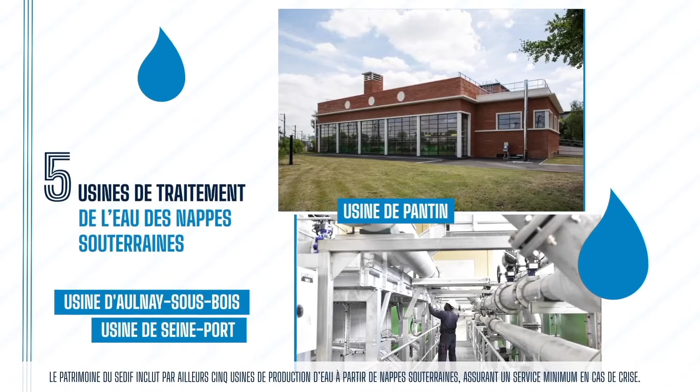Le patrimoine du SEDIF inclut par ailleurs 5 usines de production d'eau à partir de nappes souterraines, assurant un service minimum en cas de crise. Il est le plus grand service public d'eau potable français et l'un des tout premiers en Europe.

En 2020, le SIAAP a mis en œuvre les moyens nécessaires pour assurer la continuité de ce service public essentiel. La mobilisation sans faille des agents du SIAAP pendant cette période complexe montre son engagement auprès des territoires et des usagers. Il a notamment continué à effectuer plus de 420 000 analyses pour surveiller son eau et garantir une qualité d'eau irréprochable.

Dès mars 2020, tous les usagers du SIAAP étaient rassurés sur la qualité de l'eau délivrée, un service essentiel qui l'est encore davantage lorsque les populations sont confinées et au moment où se laver les mains régulièrement est l'un des gestes barrières les plus importants comme rempart contre la transmission de la maladie.

Pour assurer la maintenance et le renouvellement régulier de ces infrastructures, le SEDIF a investi 91 millions d'euros en travaux cette année, mais aussi pour soutenir l'activité économique de son territoire.

En 2020, le SIAAP a poursuivi ses études visant à étendre la technologie d'osmose inverse basse pression, OIBP, à ses usines d'Arvigny, Méry-sur-Oise, Choisy-le-Roi et Neuilly-sur-Marne.

Le projet, vers une eau pure sans calcaire et sans chlore, a pour objectif de délivrer une eau toujours plus pure, très douce, agréable à boire, sans perturbateurs endocriniens et sans résidus plastiques.

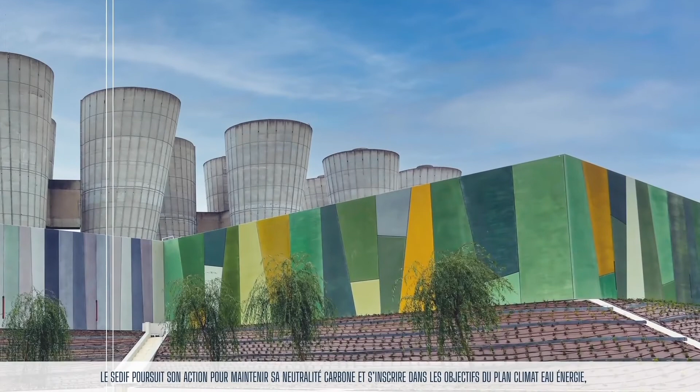Le SEDIF poursuit son action pour maintenir sa neutralité carbone et s'inscrire dans les objectifs du plan climat-eau-énergie en réutilisant la chaleur produite par ses installations et en compensant ses émissions résiduelles de gaz à effet de serre.

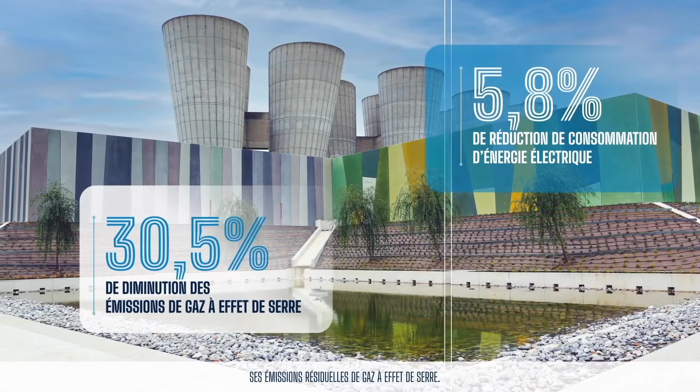Ces innovations permettent au SIAAP de toujours délivrer une eau d'excellente qualité au bénéfice de tous, à un prix maîtrisé, en baisse de 10 centimes au 1er janvier 2020, revenu au prix en vigueur en 1998.

Acteur de proximité solidaire, le SIAAP se mobilise pour aider les foyers fragilisés sur ces territoires. Il consacre 1% des recettes de vente d'eau, soit 2,5 millions par an, à son programme Eau solidaire.

Au-delà des frontières, le SIAAP a contribué en 2020 à 21 opérations dans 14 pays pour plus de 2 millions d'euros.

Parce qu'il est un acteur performant, engagé et durable au service des collectivités territoriales et des habitants, le SIAAP entretient et garde la confiance de ses membres.

Année d'élection, 2020 salue l'arrivée de nouveaux délégués. 4 sessions de formation leur ont permis de se former au fonctionnement et aux enjeux du service public de l'eau malgré la crise sanitaire.

Les nouveaux délégués ont réélu André Santini président et ont engagé leurs réflexions et leurs débats sur le choix du mode de gestion à l'horizon 2024.

En s'appuyant sur les études menées en toute transparence par une équipe pluridisciplinaire et indépendante. En anticipant les enjeux d'avenir, le SIAAP se positionne comme un acteur innovant, performant et durable au service des collectivités territoriales et des citoyens.

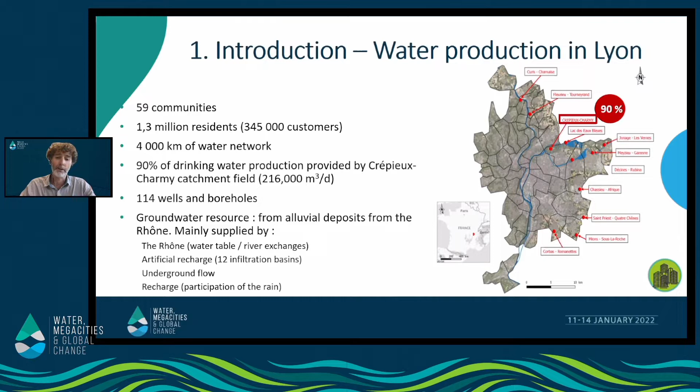Let's start with a brief presentation of the city of Lyon. We have 59 communities, 1.3 million inhabitants. The network is made of about 4,000 kilometers of pipes, delivering approximately 216,000 cubic meters per day. We have 114 wells pumping water from underground resources, and we also use water from the Rhône River.

I think the slides are changing a bit too rapidly, but it doesn't really matter.

Don't go too fast when changing the slides, please. I'm not finished with that one. Thank you very much.

Many studies prove that the climate is becoming hotter in Lyon, in the south of France. We can see that temperatures are going up near the Rhône River, the river's temperature is rising, and the outside temperature is also going up in Lyon. So we have to react and adapt ourselves.

Next slide, please. Thank you very much. So you can see results here on this slide. Les résultats... Oui, non, c'était avant. It was the one before that, the previous one. So the one before that, please. Yes, that's the one, thank you very much.

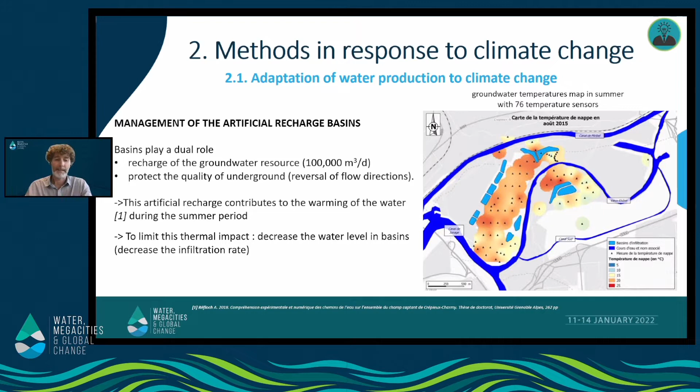The results you can see on the slide come from a PhD. The first one is on the artificial basins, shown in light blue on the slide, which are used to keep the right level for the water table. The drawback is that they actually contribute to the increase in temperature during hot periods, so what we're trying to do is limit the speed of infiltration, but it's not enough.

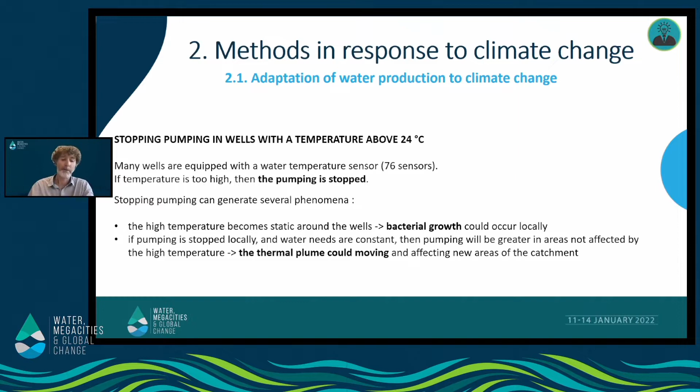So what we have done is put special equipment in place to measure temperature. If temperature goes above a threshold, pumping stops immediately, and pumping starts in colder areas instead. But this creates a major problem: there is a risk that bacteria might develop around the wells that are not functioning, and temperatures might also go up in all the basins.

No, the slide before that, please. The one before. One more. That's the one.

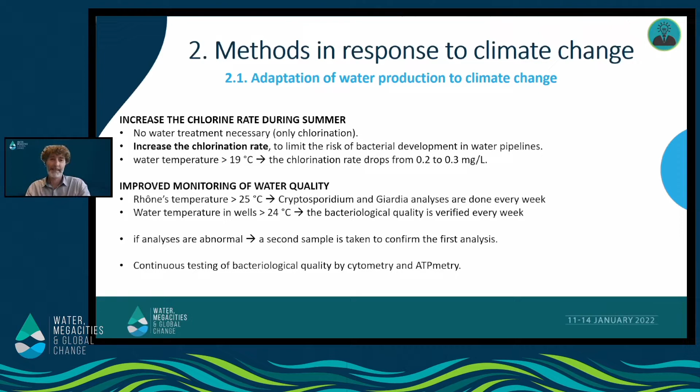Next slide, please. It's the one on Smart City.

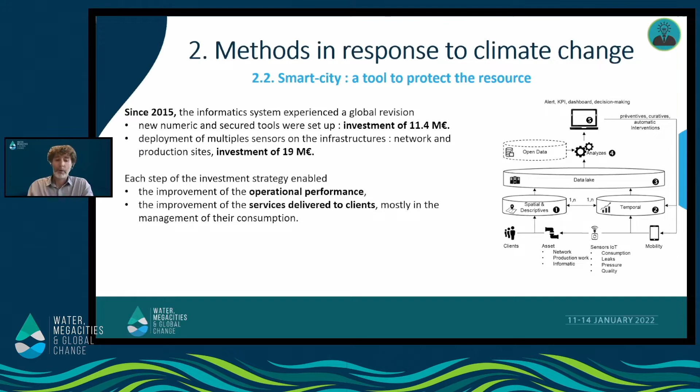Thank you very much. So since 2015, in Lyon, we have entirely modernized our information system. We invested more than 11 million euros in it, adding new tools and investing in new sensors to measure pressure and quality. What we're trying to do is attain the right level of performance in terms of monitoring and quality, and to give the right answers to the client, because this is what matters.

It has an impact on the consumption level, and make sure that we don't use too much water compared to the level of resources available. Now, what you can see on the right of the screen is the efforts we have undertaken in order to simplify our system. We have improved our descriptive database, customers, technical equipment, software.

And then we also have a digital monitoring system. Monitoring is done entirely using digital tools. We have a report on all that is done. We have sensors and smartphones that are part of our equipment. Now, thirdly, all this data is sent to a storehouse, so that really enables us to improve the general performance of the whole system. Fourthly, it gives us access to all our data.

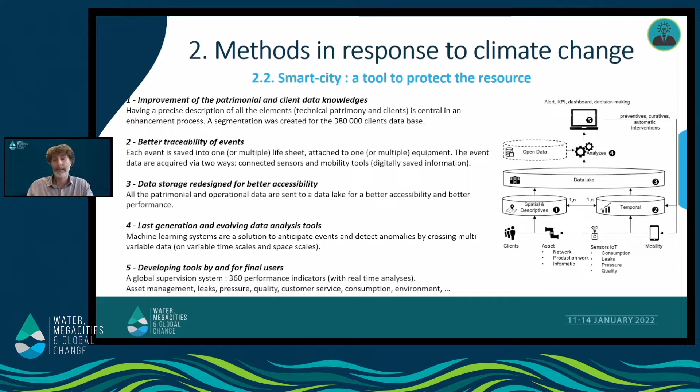It's a single stop shop, and we're really trying to innovate. We have people within our teams who are specialized in analyzing and who can do predictions. And we also use outside data coming from the French National Meteorological System. We have, as of today, 360 performance indicators specially developed. Some of them can be used in real time and enable us to do predictions hourly or daily, depending on our needs.

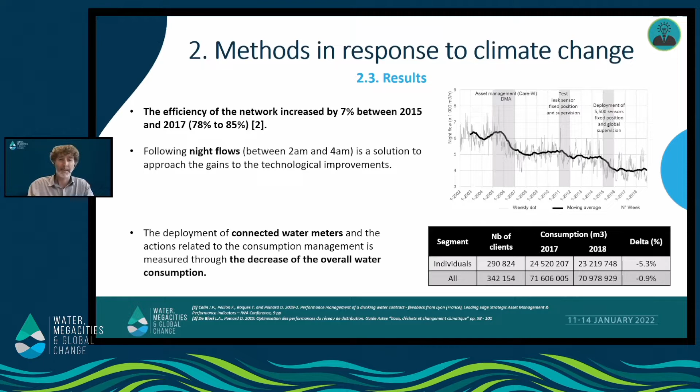We have to use innovation. Innovation helps us improve the resilience of cities, of communities, and we have to fight against overconsumption. We have to be more sober when it comes to using water, and we have to work within the global warming plans.

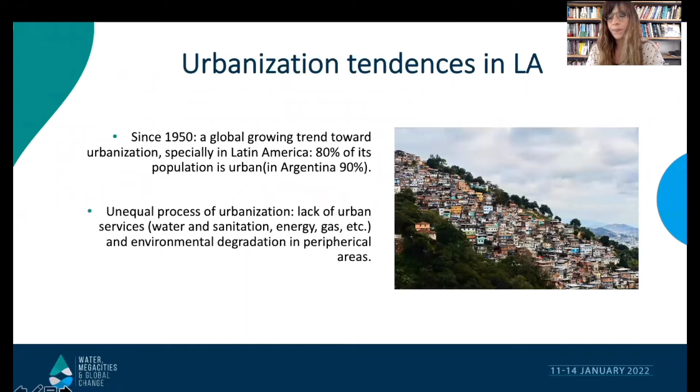The theoretical approach that we use in this paper is inspired in Graham and Marvin's concept of splintering urbanism, which shows how the role of networks infrastructure increases urban fragmentation.

This framework evidenced the existence of bypass strategies of urban developers and service operators to extend services to rich peripheral areas without entering to poor neighborhoods. And also the way in which the restriction on access to the service for low-income population historically has been justified by regulatory frameworks that require land tenure and technical arguments on slums and informal settlements' urban characteristics.

In consequence, the design and expansion of the water and sewage networks in the region reveal a scenario characterized not by an integrated network connecting different areas, but by the image of infrastructure archipelagos where formal and informal service provision overlap.

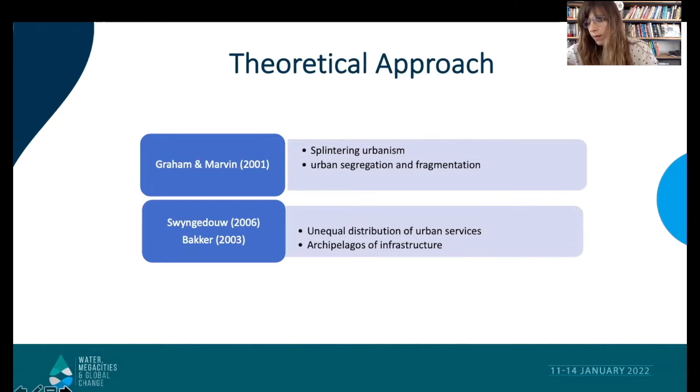To fulfill the aim of this paper, we choose to work with primary and secondary sources. Regarding the former, we conducted in-depth interviews with water professionals from different state organisms and technical and academic experts from the sector. Regarding secondary sources, we had gathered and analyzed resolutions and regulations of the water company and the regulatory entities, as well as index data and statistics.

The MABA, the Metropolitan Area of Buenos Aires, represents the urban territory comprised by the city of Buenos Aires and 24 municipalities or districts of the Greater Buenos Aires, located around the city in forms of rings or crowns. In the MABA live more than 13 million people, and it is the most densely populated area in the country. It is estimated that due to the pandemic economic impacts, poverty in this area reached 50% of the population.

In this territory, the average of water supply reached 76% of households and 57% in the case of sewage drains. However, these values are not uniform for the whole territory. The city of Buenos Aires presents a coverage close to 100%, while in the most peripheral municipalities of the region, water supply is around 30% and sewage only 10%.

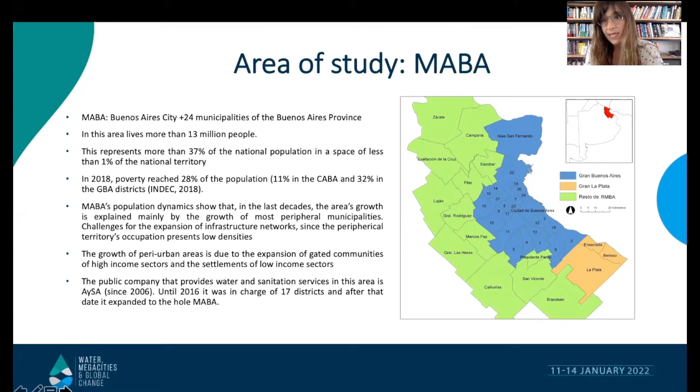Socio-spatial inequality in access to networks is not only manifested in the most remote districts, the most peripheral ones, but also in slums and informal settlements of the metropolitan area. More than 100 informal neighborhoods are located in the MABA. Only 50% of these have drinking water services and 4% sewage drains.

As we said in the beginning of this presentation, we would like to analyze two major challenges that the water company AySA currently faces in relation to the universalization of the service. This means the expansion of the concession area to peripheral and deficit areas and the provision in slums and settlements.

Since 2016, AySA expanded its area of competence, covering now practically the entire metropolitan area. It began with 17 districts, and now it has more than the 24 of the metropolitan area. The incorporated districts, where live more than 3 million people, doubling the population of the original area of concession of AySA, correspond to peripheral areas with high levels of poverty, especially slums and informal settlements, and low coverage of services. On the new area, only 38% of the population have water supply networks and 27% have access to sewage.

The main problem regarding the service in this area, previously in charge of a provincial public company, included structural deficient facilities, lack of maintenance of the existing infrastructures, water supply continuity and pressure problems, and especially quality problems of water linked to underground water resources.

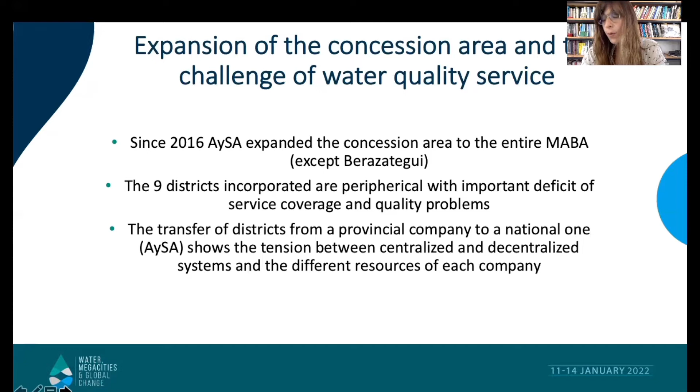Regarding the problem of expansion in slums and settlements, more than 1.2 million people live in MABA in slums and informal settlements. They all face problems related to water and sanitation, and in many cases this is compounded by the need to share the bathroom with other households.

In the slums, which we call villas here, generally located within or close to the area served by AySA—the city of Buenos Aires and the first ring of districts near the city—the predominant strategy for getting water supply is through self-built networks and clandestine connections to the company's network outside the neighborhood's perimeter. They face frequent problems of low pressure and possible contamination of pipes with sewage effluents and soil pollution.

Unlike the villas, in the more peripheral areas, informal settlements, the most popular water supply source is groundwater, accessed through individual perforations. Here the main problem is the depth of the wells, since in some areas it's necessary to reach 60 meters to obtain quality water. Besides, problems with the electrical connection of these households directly affect accessibility to water, since without electricity, the motor pumps that extract water stop working.

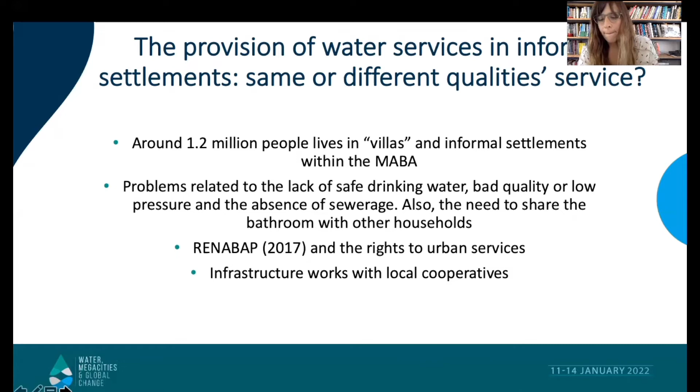So what are the things that we try to show in this paper? The document shows the role played by water and sanitation infrastructure networks in the production and reproduction of inequalities in the metropolitan area of Buenos Aires.

We seek to demonstrate the huge unsatisfied demands still persisting, as well as the challenges for public organisms to overcome the service deficits in the short term.

The network of institutional and regulatory competences, as well as the attitudes and different management cultures ingrained in the main governmental actors - AySA, the public company, and the provincial and municipal authorities - have delayed effective solutions.

Without leaving aside as a limiting external factor the economic evolution of the country, which affects the continuity of the investment and maintenance processes of the infrastructure, particularly that of water and sewage.

Although a constructive vision could recognize some progress, such as the water plus work (agua más trabajo) and sewage plus work (cloaca más trabajo) programs, the RENABAP, the socio-economic integration plans, the urbanization and integration policies of the population residing in villas and informal settlements, the relaxation of restrictions for extended networks in informal neighborhoods, and the relative improvement of services in the new districts of the metropolitan area - all this process has been slow, partial, and insufficient.

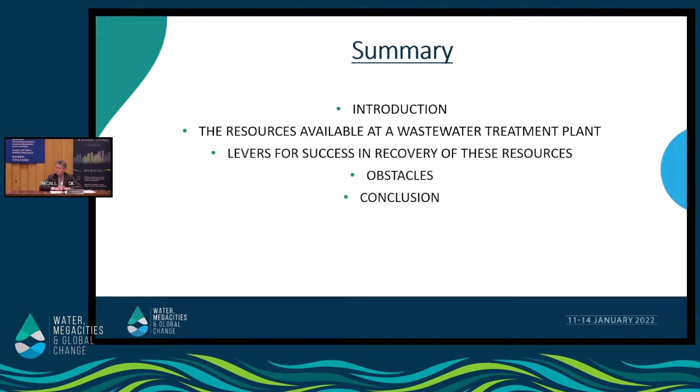So following a brief introduction, I'll take stock of the resources available at a wastewater treatment plant. I will also draw the list of what I believe are levers for success, what can facilitate the recovery of these resources, and I will do the same for obstacles and barriers to resources recovery, and I will draw some conclusions.

To start with, I'd like to say that in the history of wastewater treatment and sanitation, successive questions were asked and answers were found. The first question concerns health and hygiene: how was it possible to protect human beings from diseases carried by dirty water? For centuries, the answer was to take sewage far away from population and settlements.

Second question, which complemented the first one: environment protection, and in particular the protection of water environments, because these water environments didn't have enough capacity to absorb all the wastewater discharged into them. That was the whole issue behind the building of wastewater treatment plants in the last century.

And I think that today we are confronted with a third question. I'm not saying the two first questions have received exhaustive answers, not at all - it's just that we have a third question that complements the first two. That's the issue of circular economy: how can we recover resources from wastewater of urban areas?

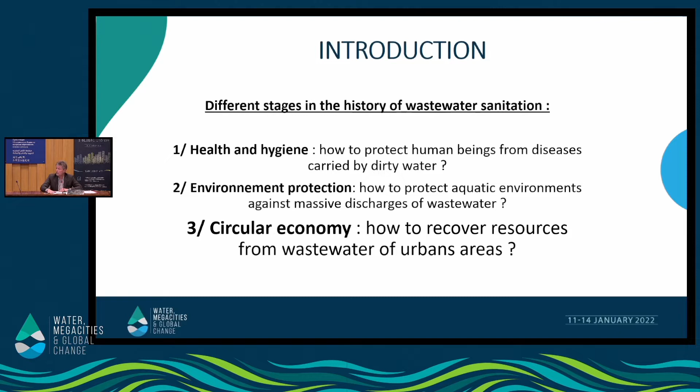We know that resources are becoming scarce, and that is why we have more and more to think about building a circular economy. So when we talk about available resources in wastewater treatment plants, what are we talking about? The first one, the most obvious one, is water.

Now, when we're talking about wastewater treatment plants, we have water everywhere. That's where we send all the sewage, all the wastewater, so this is where we find water all the time. And when water stress is becoming more and more important, the question of the permanent availability of water resources is particularly acute. And that's also where water quality is maintained - it can be more or less easily controlled. So this is very valuable, and following complementary treatment, water can be used to water fields, to water green areas.

There are many different types of uses that are important. Now, in order to recover water treated in wastewater treatment plants, there are three major issues here. First, you have the health issue. Users need to get all the guarantees when it comes to the quality of the water. The user has to trust the water quality, and we have to make sure that the quality of the water is sufficient.

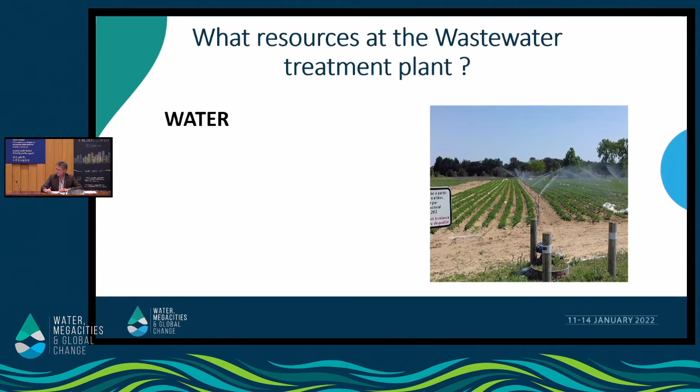And then there's a third issue that has to be taken into consideration: environmental issues. If we want to recover resources from wastewater treatment plants, we must make sure that this water is used efficiently. When water levels are particularly low, water can be used to increase the level in rivers. Now, we have to be very careful the way we use the water we actually recover. So we have three major issues here: health issues, environmental issues, and cost issues. And answers have to be found to these three questions. And when it is the case, then it's possible to use this type of water in order to fight against the impact of climate change.

Now, the second kind of resource available at the wastewater treatment plant is energy. Energy comes from the anaerobic digestion of sludge, and this generates biogas. This process, the digestion of sludge, is a process that has been known for many decades now, and the technologies used at water treatment plants are very mature.

What is new today is that when the first digesters were installed at treatment plants, the objective was to reduce the quantity of sludges. Biogas was produced - part of it was used within the treatment plant to keep the temperature at the right level, and the rest of it was actually burnt. So in rare cases, maybe that was the exception, but the main objective was not to use the biogas that was produced by the process.

But today, this biogas can be re-injected into the gas network. Now, of course, we have to treat it first, but it is a possibility. Another option is to co-generate it to create a mix of heat and other types of energy. There are many different potential uses, which means that we have to think over the way the water treatment plants are being designed in order to optimize the production of biogas, which means that in the future, if this is one of our objectives, the way treatment plants are designed will have to change.

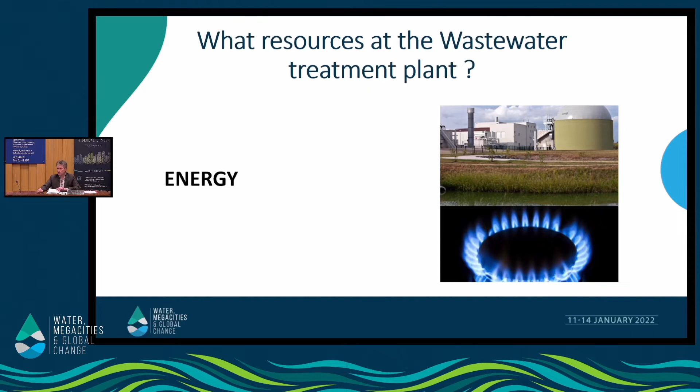Now, what is at stake here? Well, here again, it's finding the right balance between the cost of such solutions and the value assigned to the energy being generated. So in large treatment plants, it's easier to find the right balance. And we have to define the critical size of treatment plants, and the critical size should decrease. And of course, there are environmental issues. We're talking here about methanization, and about innovative processes being installed in order to optimize energy generation at wastewater treatment plants.

And the third resources are the fertilizers. We can use them differently. First of all, we have liquid sludges. Now, in many places, we'll still use sludge - we spread them in fields, and farmers actually like it because it's a good way of treating soils and adding rich material to soils.

A second way of using fertilizers is to add it to a compost, and in order to produce a compost that can be used again to improve soils. And then, of course, the issue here is a health issue. Farmers who will use this product must be sure of the fact that the product they use is safe and that traceability is possible. So we have to define the right standards for these products and establish the right rules when it comes to traceability and monitoring. And in water treatment plants, we already have the necessary technology to recover phosphorus.

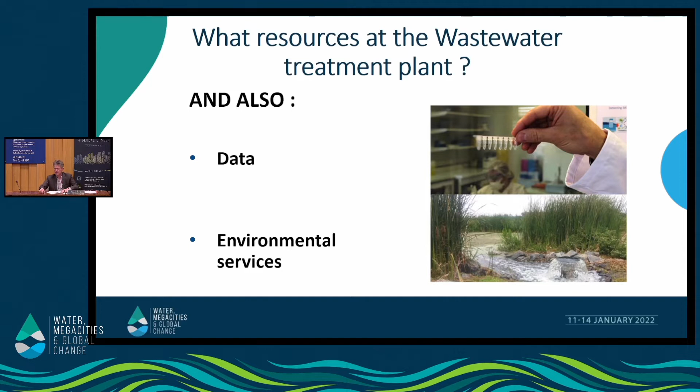What can we do to facilitate the recovery of these resources? Well, first of all, there's growing public awareness.

I said a few minutes ago that a few decades ago, we would burn, flare biogas. Today, it would not be socially acceptable because today, for obvious reasons, we're trying to use renewable resources. So it's not acceptable anymore to flare biogas. So growing public awareness.

Second level, an improvement in the way sanitation systems work. The controls are better. There is less direct industrial waste. Industries treat their waste before discharging them in the sanitation network, which means that in the wastewater that reaches treatment plants, we have fewer undesirable substances than a few decades ago. We have less heavy metals, for example. This is what studies show.

So that means that the quality of wastewater has improved and control is getting better. We know better where, we know better what wastewater contains, which means that the sludge or the water being treated is of better quality. So this was the second lever.

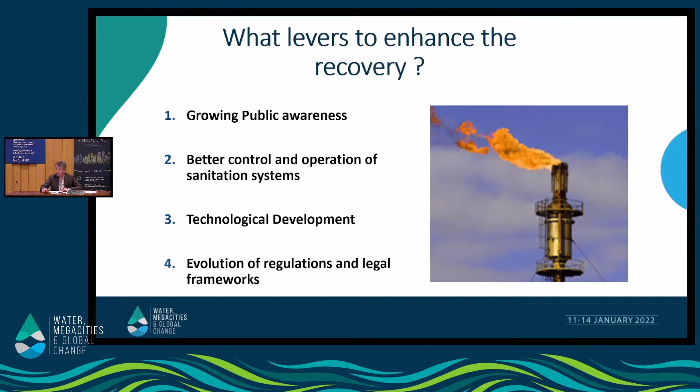And the fourth lever is the development of rules and legal frameworks. In France, for example, text on circular economy was adopted at the European level. Texts were adopted in order to regulate the use of sludge in fields. So these are the main levers that can be used in order to improve resource recovery.

Now, of course, there are obstacles. The first one is the economic viability of the projects. It's finding the right balance between the cost of the projects and the value of the resources recovered.

Now, of course, as the recovered resources are in competition with primary resources, for example, biogas produced at wastewater treatment plants is competing with natural gas, which is not very expensive, and I would dare to say not expensive enough. So it's not always easy to find the right economic balance.

Second obstacle, there seems to be a contradiction between environmental issues, pushing for circular economy, and health concerns, talking about micropollutants. I'm not saying here that we have more micropollutants, it's just that we measure them better, we can identify them better, and so concerns are going up.

Third obstacle, cultural reluctance. When we talk about wastewater, the image we get is not really positive. Debates can be very important. So there is a cultural reluctance, even though the situation is developing in the right direction. And the more we see resources being depleted, the easier it will be to overcome this cultural obstacle. Now, the fourth barrier would be rules and regulations.

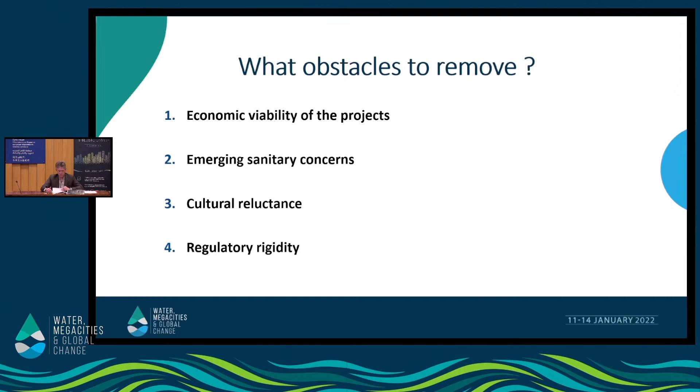Some existing regulations really have an impact and make it more difficult to develop resource recovery projects. So to conclude, how can we go forward? We have to try to overcome the different obstacles, and I have 6 ideas to share with you. The first two are more technical in nature: increasing knowledge about micropollutants and their toxicity, and developing more efficient and productive technologies, using clear tools to evaluate environmental impact and reach the right balance between project objectives. So these are the more technical conclusions.

Then there are issues around governance: improving the management of sanitation systems so that trust in these systems builds up in order to overcome existing reluctance, and communicating and sharing information on these issues transparently and as clearly as possible. And of course, there has to be a very clear political commitment so that sanitation becomes part of the circular economy. Thank you very much for your attention, and I'm here to answer your questions, should there be any.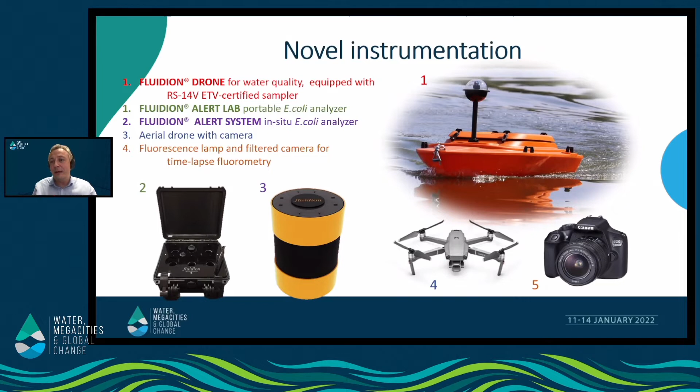We used rapid biological analysis with the Alert Lab, which is portable, and the Fluidion Alert system, which is in situ, installed on site and carrying out measures at different times of day over the course of one month. We also analyzed images using an aerial drone with an onboard camera, and carried out measures of wastewater dilution using a system of cameras with filters in order to perform quantitative fluorometric analysis.

The first phase of the study was a dispersion study. The 5 boats, at a specific moment, emptied their wastewater into the water, and fluorescein was added to the wastewater before it was flushed out. The fluorescein then finds itself in the river, and thanks to its concentration in the water, we can calculate the dilution factor of the various water rejections, compare it with the various concentrations of bacteria, and understand how different types of water disperse over a surface of several hundred meters.

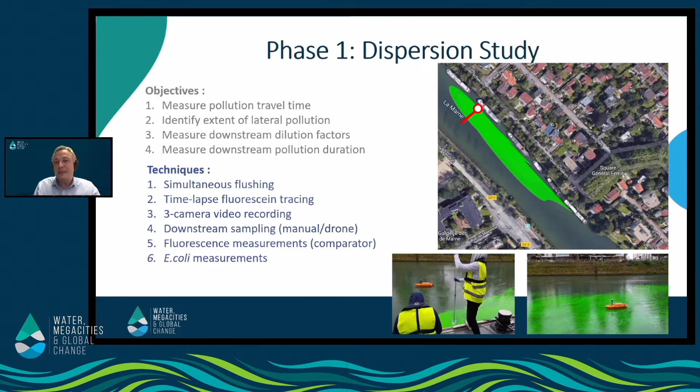In order to do this, we carried out a study of fluorescein concentration over time—I'll show you the comparators we used in a later slide—and we also carried out E. coli measurements.

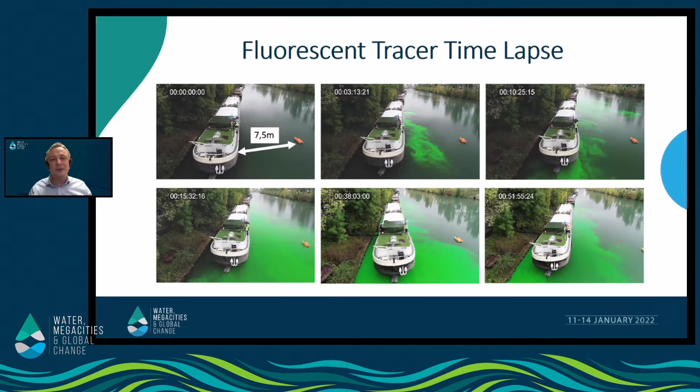Here you have several aerial views of the experiment. This is the Anaval riverboat, the last one. At time point 0, this was before the flushing out of the wastewater and the fluorescein. Then you can see the different points at which the fluorescein spread through the water, and by the last frame, most of the pollution is already gone. You can also see the position of the drone, about 7.5 meters further, around the middle of the river, placed there to see how the fluorescein diffused, not only along the boats but also on an axis perpendicular to the boats.

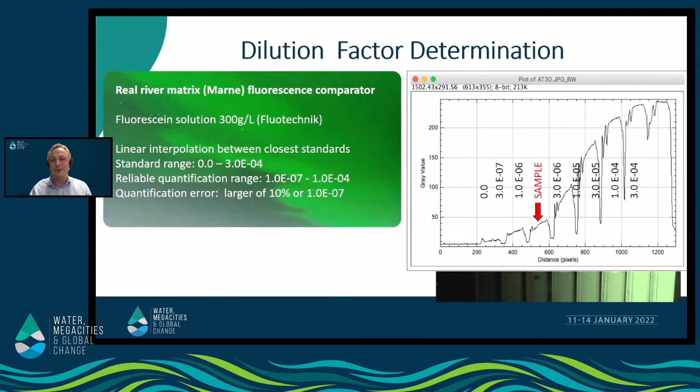This is the dilution factor determination of the fluorescein. It was mixed with the Marne water to avoid the presence of parasitic fluorescence. Thanks to this comparator, we could compare it to its close neighbors to define the dilution factors.

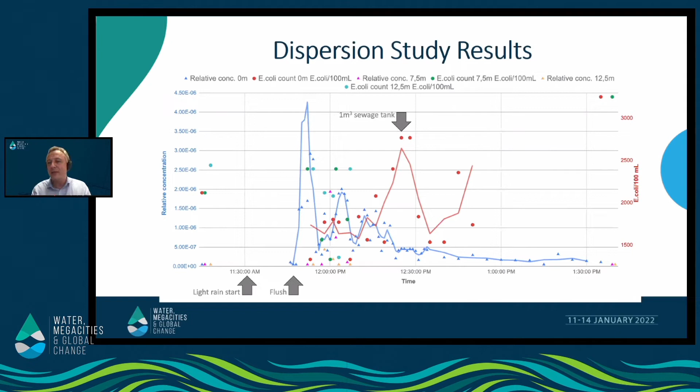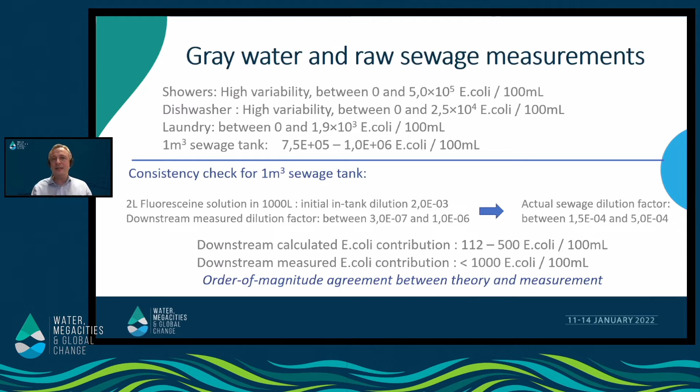For the gray waters, we compared different types of gray water, and we also compared the wastewater that was in this cubic meter tank. We got values of about 1 million E. coli bacteria per 100 milliliters. Then we calculated the dilution factors and divided the initial concentration by the dilution factor, and we got a result of about 500 E. coli per 100 milliliters.

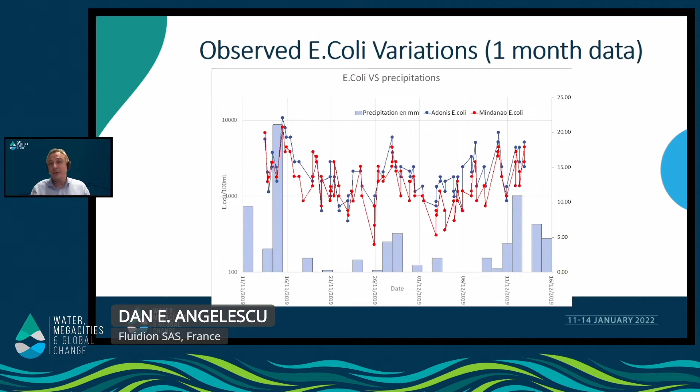Here you can see the two measures. Adonis is the upstream one and Mindanao is the downstream one, and the blue bars represent rainfall. You can see concentration peaks in both systems after rainfall, with a few important rainfall days at the beginning, middle, and end.

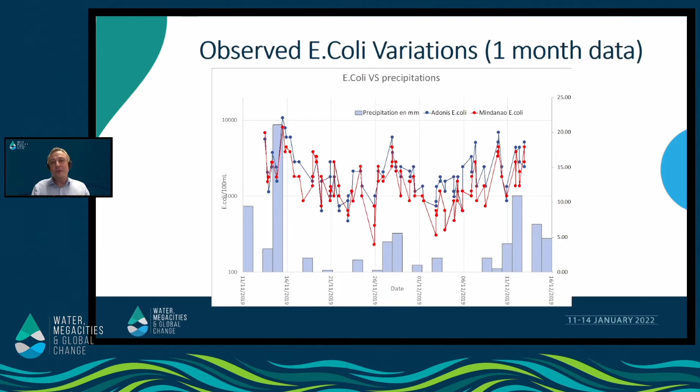Then there are periods of dry weather when bacteria concentrations diminish. But what's surprising is that the downstream concentrations are slightly lower than the upstream ones. Why would it be so? Would it mean the boats don't contribute to pollution and actually absorb it? Of course that couldn't be the case. What it means is that compared to other factors, the pollution calculated from wastewater rejected by these canals was weaker than other factors.

You have 2 minutes. Yes, okay, I'm nearly done. One thing we observed is that upstream, for the first boat, there was a high accumulation of debris that accumulated just above the boats, just upstream.

When this debris would go down past the analyzers - and this debris contains lots of wastewater, including fecal matter, dog waste for example, that could be washed down by rainfall - this is what contributes to the slightly higher concentrations of bacteria measured upstream compared to downstream. This highlights some of the problems with this type of study: factors that can disrupt it are varied in nature, and these factors can have a far more significant impact than the source of pollution we thought we were measuring in the first place.

Another important thing is that the pollution from the quayside, from the land, was more important than we thought it would be. Does this mean they don't need to treat their wastewater? Of course not, they do have to treat their wastewater.

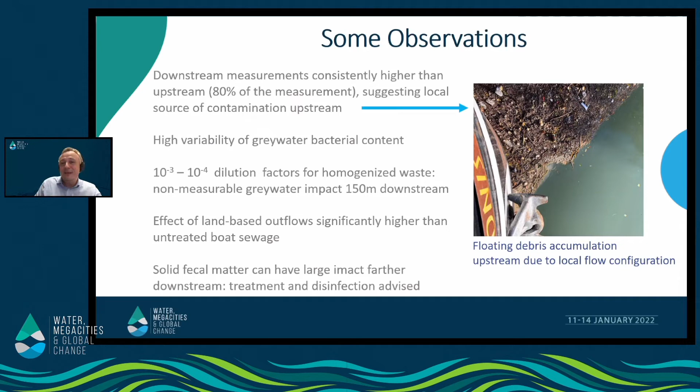But what's most important, if we look at the last slide, is that we developed a robust technology that is consistent when it comes to comparing the model and the experience, using many innovative instruments to evaluate the short and long-term impacts of different types of pollution. This is a pollution that is somewhere between punctual localized pollution and diffuse pollution - it's localized, but it goes along the whole length of the boat, so it's a bit between the two different types.

And the tools and methodologies we've developed allow us to apply these measures to complex sites, such as swimming areas or sporting event areas.